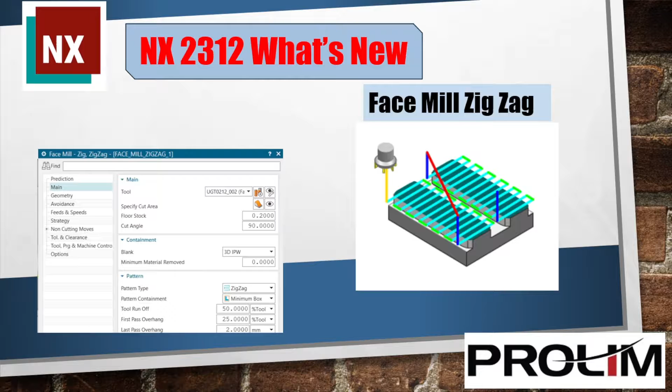Here we are, this is our Face Mill Zigzag. I have my parts set up in a vise, set up on a Haas machine. Let's go look at this operation. It lives in mill planar.

Here it is, Face Mill Zigzag. It's a milling operation that face mills a planar surface. One cut area floor must be specified. Specifying the body is optional.

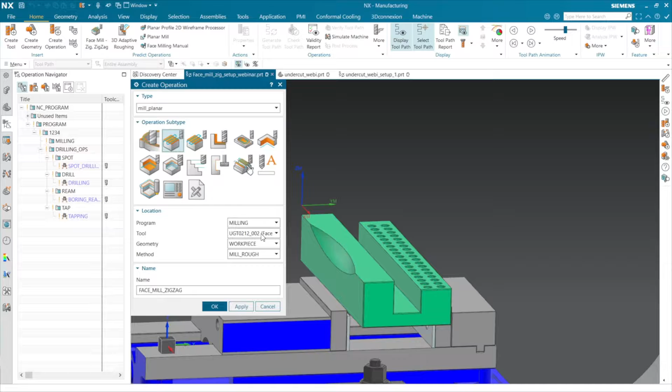We're going to go ahead and populate the rest of our parents. For our program group and our tool, we have workpiece and a 43 millimeter face mill. That all looks good.

First things first, let's go ahead and select a planar surface up here. Select OK, and we're going to let it rip and generate and see what we get. We get our first toolpath — it's just a straight path that goes across the top of the part.

That is due to our floor stock condition being 200 microns up here. Another option we have right here is a cut angle. We can actually change our cut angle.

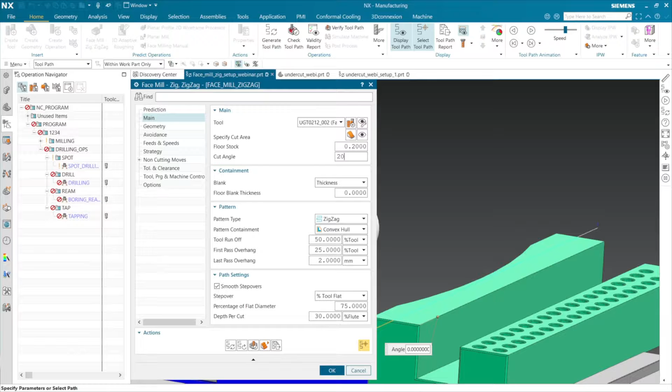I'm going to go ahead and put a different angle in here — let's put 20 degrees. You can see we get a little preview here that shows where the tool is going to be, and it can show the center line of the tool as it goes across. Let's go ahead and generate that — you can see how that works.

Right now I'm going to set that back to 0, and we're going to look at our containment. Right now that's set to thickness, and it was set to 0. We can set that to blank geometry or 3D IPW.

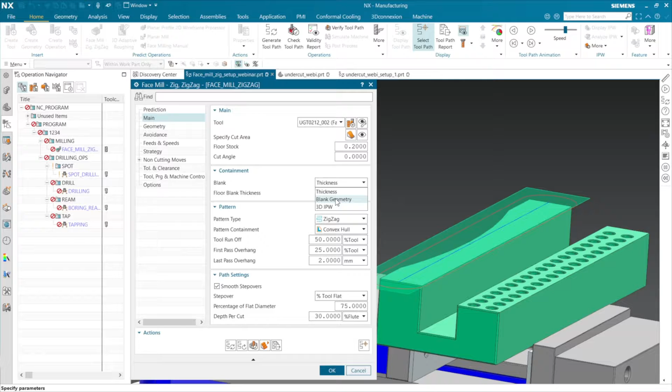Let's see how that looks. We see a preview again, and we see our operation now taking into account our in-process workpiece, or our blank.

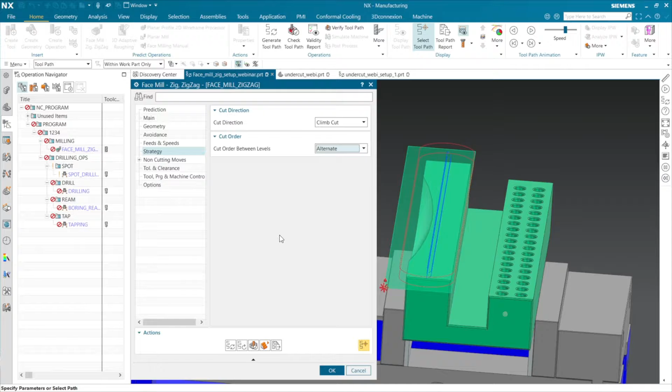Some other options we also have in here: we can also change our cut directions as well as our cut order. We can actually alternate our cut direction if we're not happy with going just one direction. You can see how we have two separate tool paths here.

Generate that and see what we get there. Very easy to get a toolpath out of this operation.

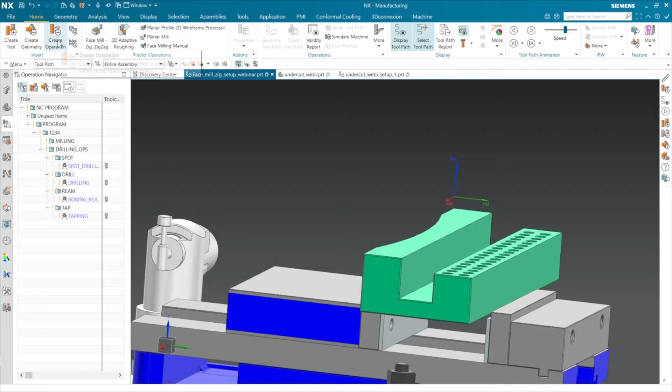Let's look at some other things in this operation. I'm going to go ahead and create a new operation, and we're going to select that bottom face. All the parents I'll keep the same. Let's go ahead and select this other bottom lower face, and let's generate that. Let's see what we get.

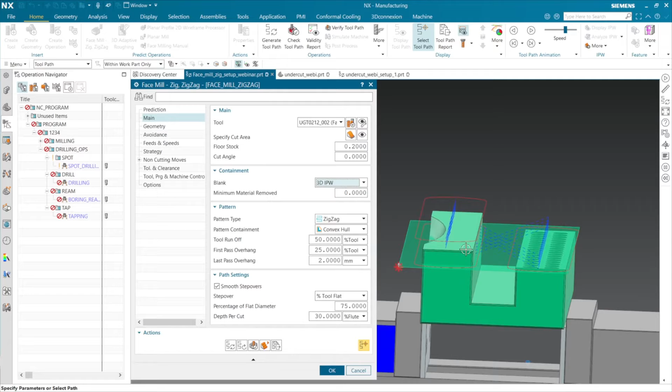Once again, we get a single line across here because we're only looking at our thickness of 0. We go back to 3D IPW, and you see we actually get the whole part now. We get that preview on the part, but as you can see, we have a bunch of collisions.

So we need to fix that. If we go into our avoidance tab, we'll be able to fix this. Let me show you where that is. In avoidance, you see we have an option — go ahead and set that to trim.

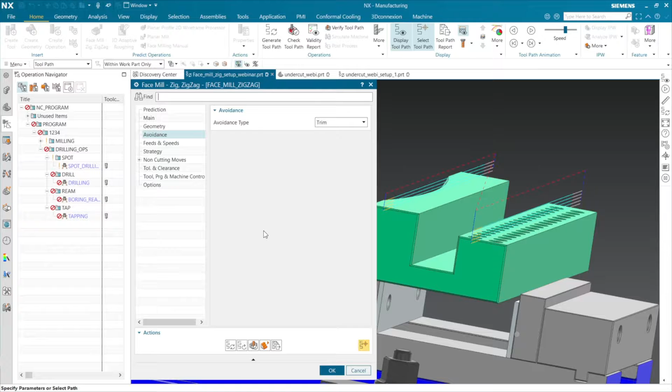We generate that again. It's going to trim away those tool passes that give us collisions, and now we have two planar surfaces that are different levels merged together. That's a pretty awesome way to be able to do this operation.

We also have smoothing options in this toolpath as well, so you can smooth out all your non-cutting moves and transfer moves. And once again, that was Face Mill Zigzag.

So next we're going to look at Merge Path Planar. We can take two planar mill paths and merge them into one. Let's take a look at how this works.

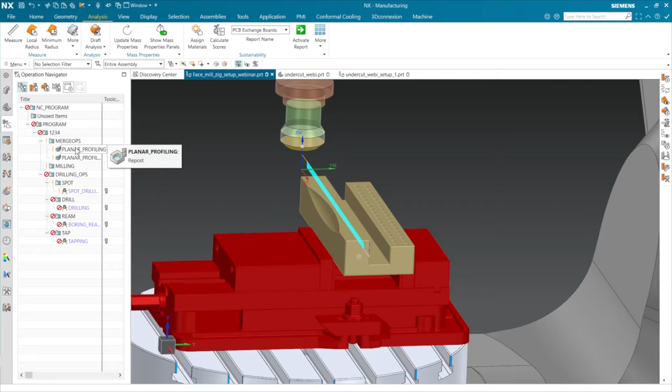So I have previously created two planar profile operations in my program here, and we can see there's just two separate operations, and we can actually go and merge them together. Let's show you how to do that.

I'm going to go to my Home tab, and we're going to go to our Create Operation. Go ahead and hit that, and we can see we have a Merge Path Planar there. We're going to go ahead and select that, show you how this works.

You can see we don't have many options. We have this by concatenation, and that's our only option. We also have non-cutting moves — since we're just joining two tool paths, that's basically our only options, our non-cutting and transfer moves.

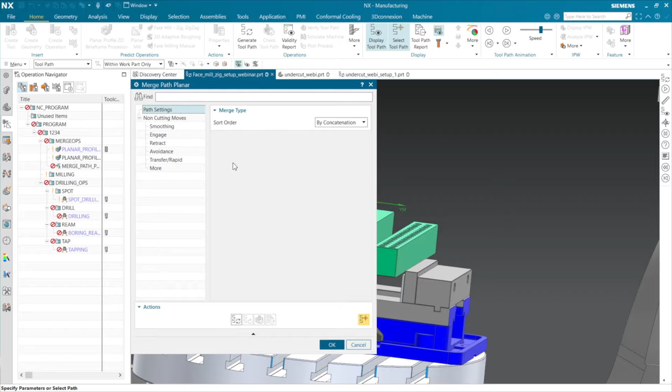So if I go ahead and take these tool paths, shift select them, I can then drag and drop them into that merge path, and then we can generate this set.

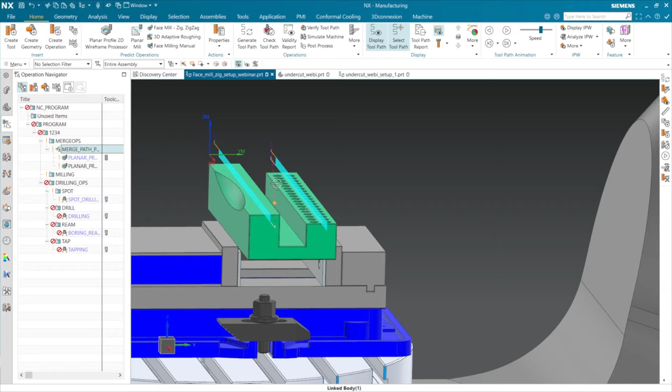And very quickly, you'll see what we have is a transfer move joining our tool paths — exactly what we wanted, and it was very quick and easy to do. So that is Merge Path Planar: our tool coming in on our upper level, transferring over, and doing our lower level.

Once again, that was merge path planar.

All right, so next we're going to look at this quick roughing operation. It's recommended for removing large volumes of material on mold cavities and cores, and it's kind of like a cavity mill on steroids. So let's look at this operation.

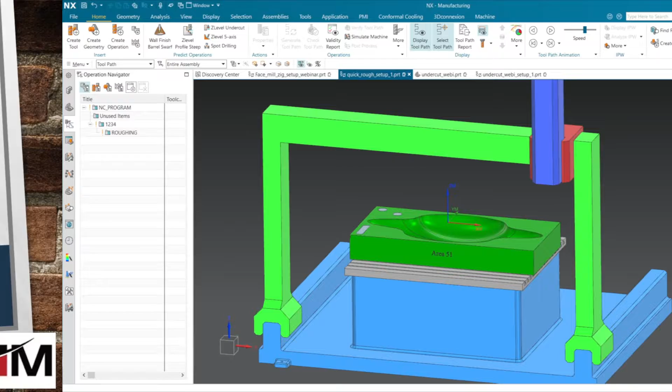All right, so let's look at this toolpath. I have my Area 51 spaceship mold set up on my bridge mill there, and we can go ahead and create this operation. So here's that quick roughing operation. We've called it a cavity mill on steroids. It's basically cavity mill, and there are some presets in here for transfers that kind of help us out.

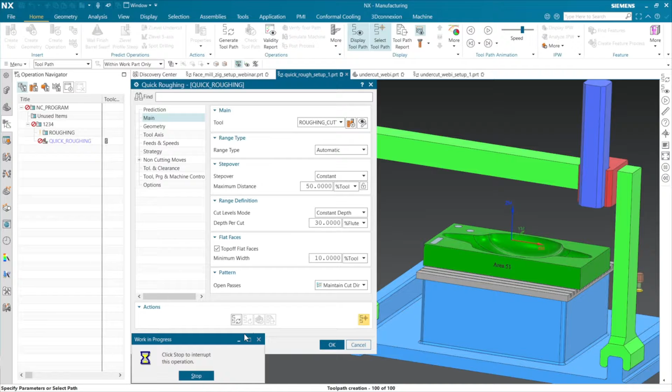Let's hit generate and see what we get. It might take a few minutes to generate because this is a fairly large part and it's going fairly deep. But what we're going to notice with this toolpath is NX is automatically going to change our engage types depending on its open area or closed area.

The only thing we would have to change in this toolpath is possibly, well, let's look at the layers first. So we can see on the top layer we came in from the side, and as we start going down, we change into a helix, where we're helixing into the part right at the transition.

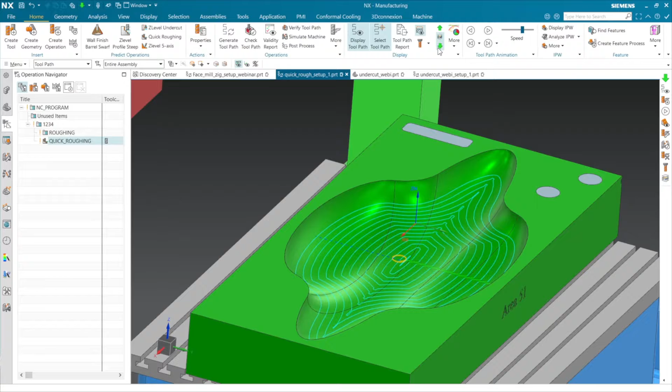So NX right now is working its way from the center out. That's based on our cut type of cut pattern, and you can see as we go down, it's going to keep on hitting the areas it can with that size tool.

So this is a very quick, efficient roughing method, depending on, of course, your cutter and your feeds and speeds.

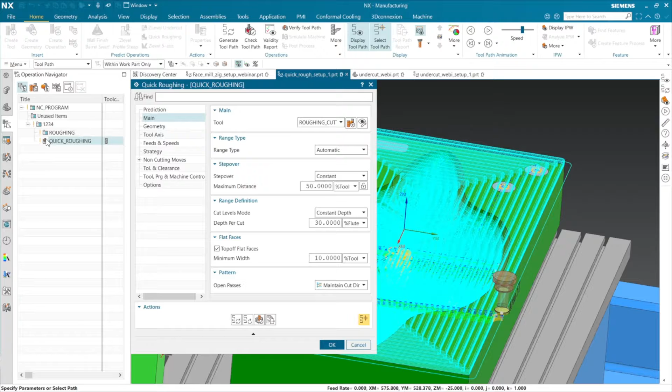We also have options for our range, cut ranges, and we can also have options for our depth or level first. We can apply smoothing to our passes, and also the region size.

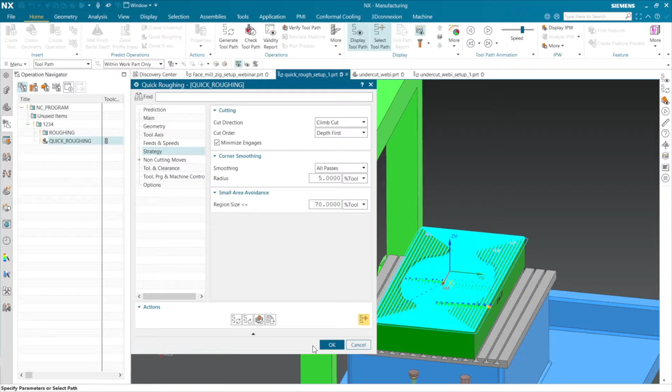So that's our quick roughing toolpath. A very quick and efficient way to rough out large areas.

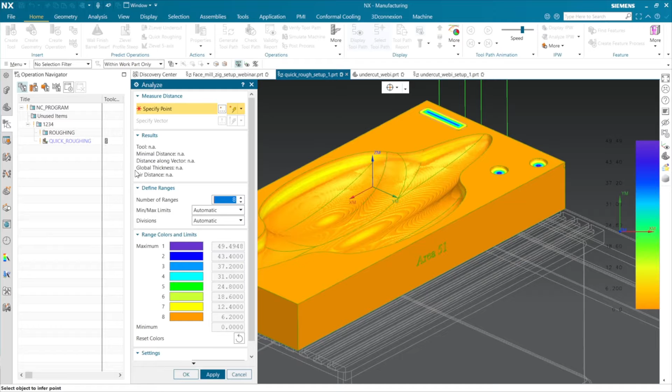So let's go ahead and take a look at our analyze our in-process workpiece and let's see what NX did to remove material. We still have quite a bit of material left, but we're definitely closer than we were when we started. We can come in and do some semi-finishing operations before we start our contouring and finishing operations.

So that was our quick roughing toolpath. That's, once again, new in 2312. Hope you get a chance to use it.

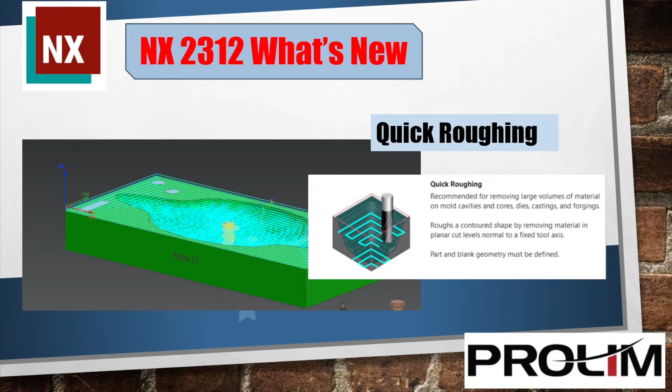So here's the next thing we're going to look at. We've had Z-level undercut for a while, but NX has added some enhancements in 2312, and let's take a look at what those look like.

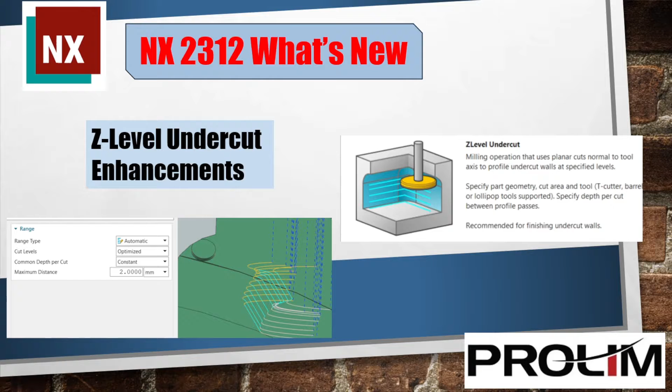So I have my parts set up here on my Makino D200Z, and we're going to go ahead and create an operation. I previously put some tools in here and have stock set up.

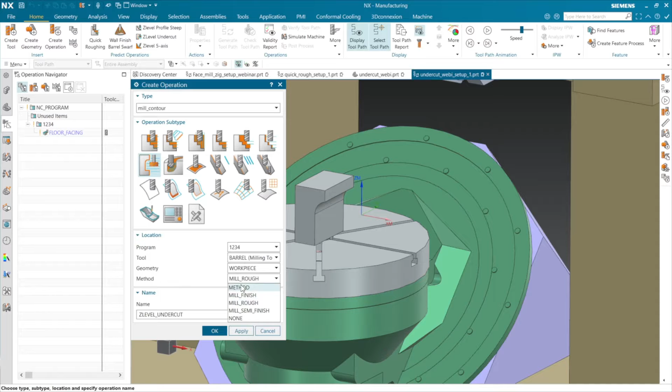So we're going to select the Z-level undercut. I'm going to put my barrel mill that I already created. Let's go ahead and go with mill semi-finish, and I'm going to go ahead and generate this once I select my cut area. Simple click.

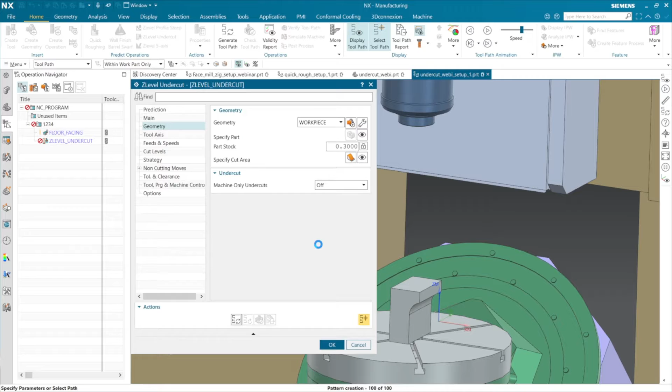And you see we also have the option here of only machining undercuts. So if we had chosen that flat face, we get that.

So we've generated, we can see we have some lines pretty far apart here. I'm going to go ahead and change the step over, the step down, so we have our tool paths a little closer together.

And there we go. You can see the space that we have as we're transitioning from shallow to steep. That's going to leave a really large scallop.

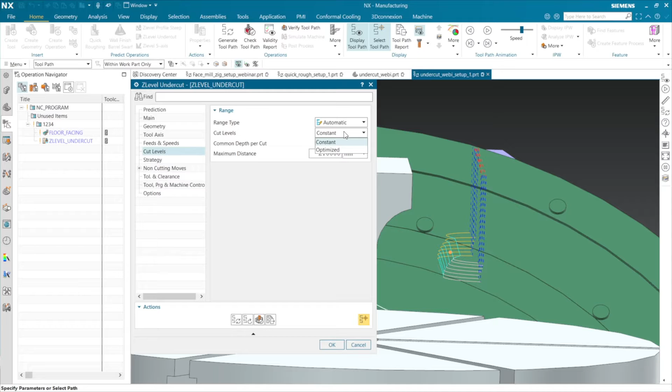And we can go ahead and change our cut levels to optimized. So that's our improvement right there, is that we've added this optimized cut levels. When we do that, you can see we've got our cut levels, our tool paths a little closer together, and that's going to help us with our scallop heights as we're transitioning from that shallow area to a steep area.

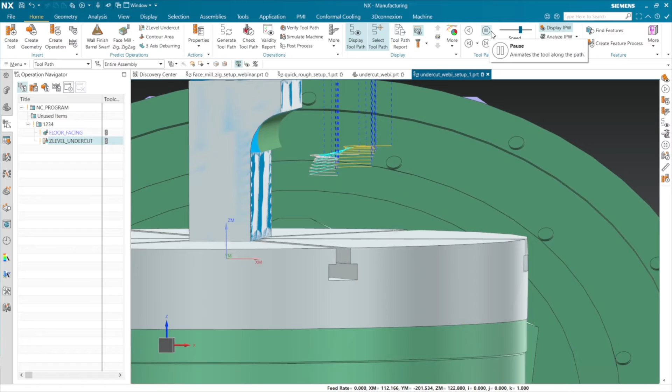You can run that, see how it looks. We're only on mill semi-finish here, so we're not coloring it out completely, but you can get the idea. So that's the big improvement, is that we added that optimized cut levels.

That's going to make it a lot easier when we go in and finish, especially—we can get a little bit more material off, a little bit more evenness when we move material, and less scallop height.

Okay, so next we're going to look at this new tool path called Wall Finish Barrel Swarf. There's a lot of options on this one, so we're going to spend quite a bit of time on it, and I think you're going to really enjoy this tool path.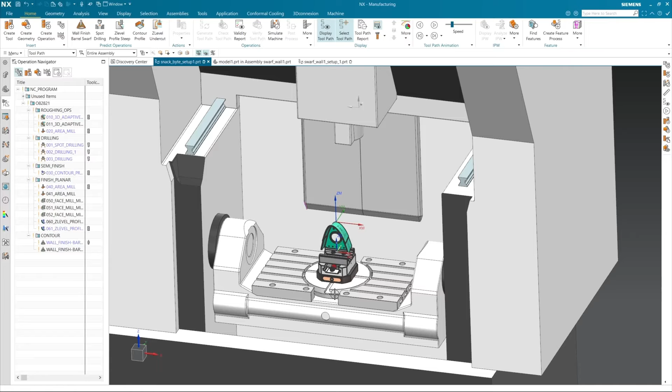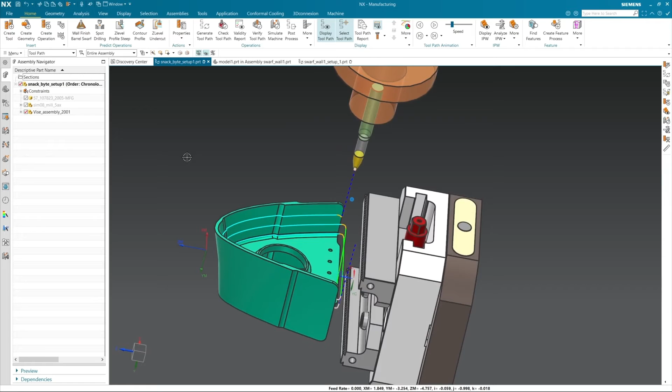So I have my little arrow part set up in my Sim 08 mill, Siemens mill, and we're going to look at these operations. I have a whole bunch of roughing operations, and we're basically down to some contouring operations for this part. So I have two set up. Let's go ahead and hide this mill so we can get around the part here. There we go. I have an inside pocket scenario set up, and I have an outside scenario also lined up here. So let's look at what the operation looks like.

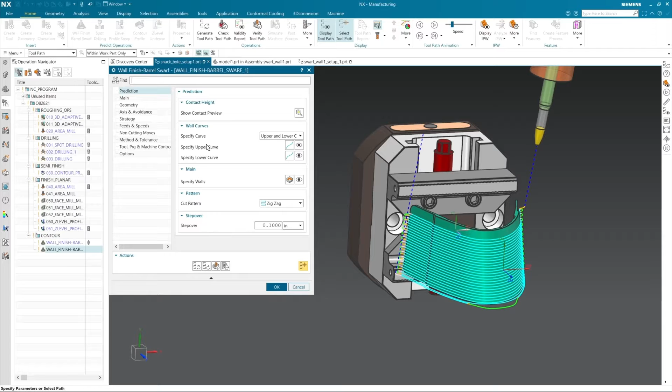See in our window, because new in 2206, I believe it was, we started to get these prediction windows, and we're going to see some of our most used options. So in our main tab, we can see what we need to specify.

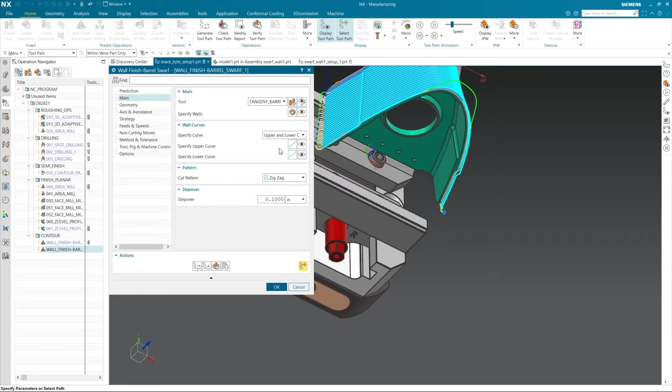So I had to come in here and specify the walls. I selected all these exterior walls as my wall geometry. We also had to specify an upper curve. I had to select a few different curves here, and our lower curve. So this is going to determine the geometry that it's following.

I'll hide that toolpath real quick. And then we have a couple more options here. We can either do zigzag, we can do zig, and we can actually do spiral. So actually, that's a pretty good illustration of how you can use that around some kind of a round part that has a draft angle in it. So that'd be a really great finishing or semi-finishing option you can have.

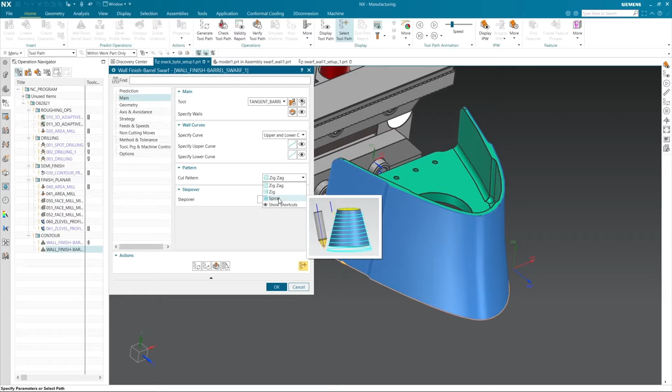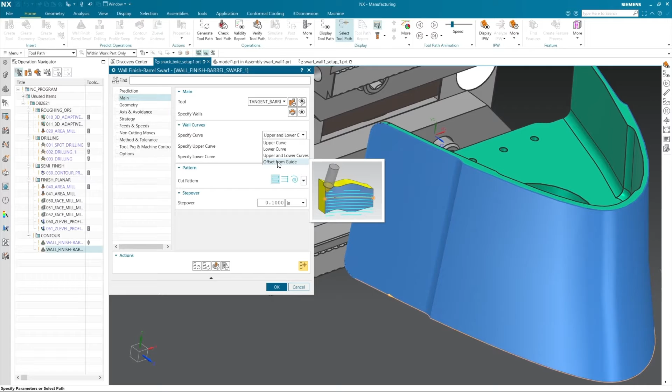We also have some options if we go with just an upper curve, just the lower curve, or the upper and lower curves. Now this offset from guide can be useful if you didn't have a good solid guide. You can see in the graphic we have here, the bitmap image, if there was some geometry in here that wasn't straight or linear, we could actually go and draw some geometry in here with a sketch and use that as our guide. We can offset from that guide. So that's a good tool to have.

We also have our step over, which we can either do in a nominal size, a percent of tool diameter, or a percent of flute length. I'm not sure if it uses the total diameter at the top of the tool, or I'm guessing it probably uses that. And we know we have the flute length, right? So right now it's set to inches.

That's the default setting. Let's look at geometry. So this is normal. We have whatever geometry we select to make sure that you have a part defined, so you can track your IPW. The part's already defined through our geometry group. You can see that under the blue skin of the selected geometry for our faces.

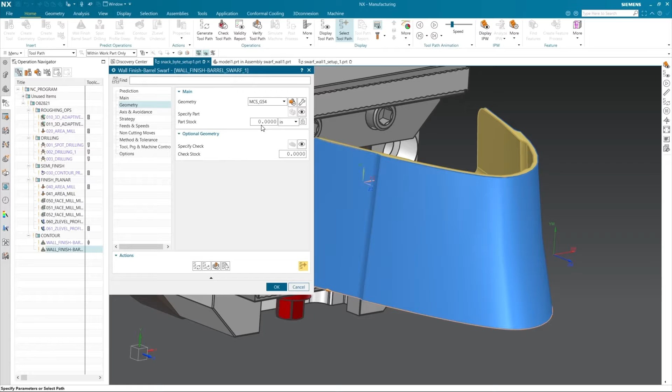And we also can specify a part stock in here. We can also have optional geometry if we had some kind of a clamp on here that we had modeled in. We could actually put some optional geometry in there.

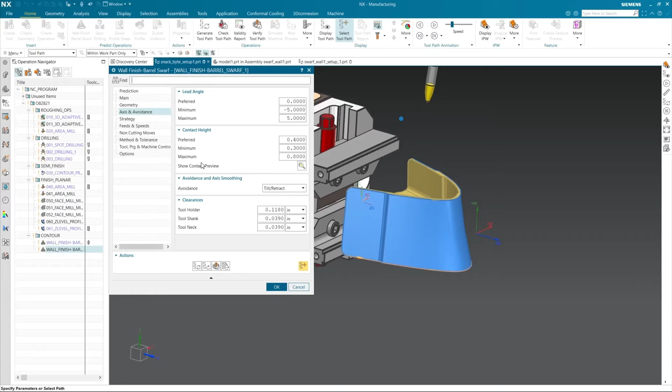So looking at the next tab, we have some axis and avoidance. And this is special to the wall finish barrel swarf toolpath. We have this show contact preview for the tool. This is pretty interesting. This is one of the interesting previews about this operation that has tool settings actually in the Windows Explorer window here.

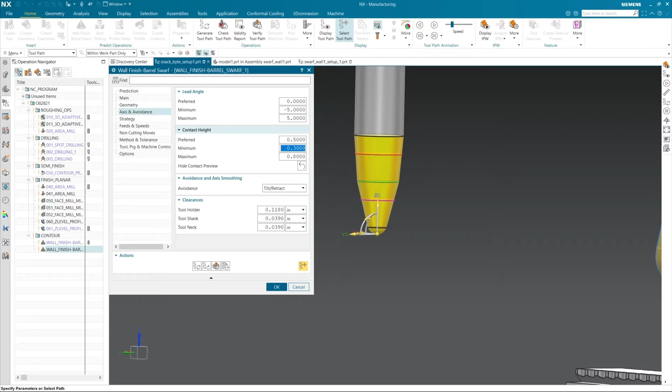And what we see here, this is actually not the default. I've been playing with this. We can see we have these contact heights. I use this little show contact height preview, and it's actually showing our contact height here. And our preferred is in green. I believe that default value is 5. Our minimum is this pink or red value you see down here. That's 3. And our maximum is 0.8. I'm sorry, I didn't put the decimal in there.

And you might be wondering now, what is that referring to? How large is this tool? It's pretty interesting. The tip of the tool being 0, and the top of the cutting portion of the tool being 1. These are all normalized values, percent values: 80% for the maximum, 30% from the minimum, the preferred 50%, this green line right here. So that's used in the tracking of the tool through the operation.

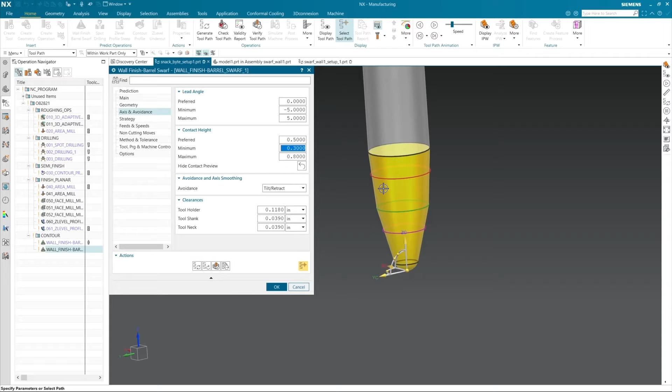And actually, I'll show you that it gives you different behavior. So if we move this tracking point up a little bit, the tool is going to tilt a little bit more this way on its axis. If we take this tracking point and we move it down, you'll see going through — this being the cutting side, of course — the tool will tilt out a little bit more to make that actually the preferred contact point.

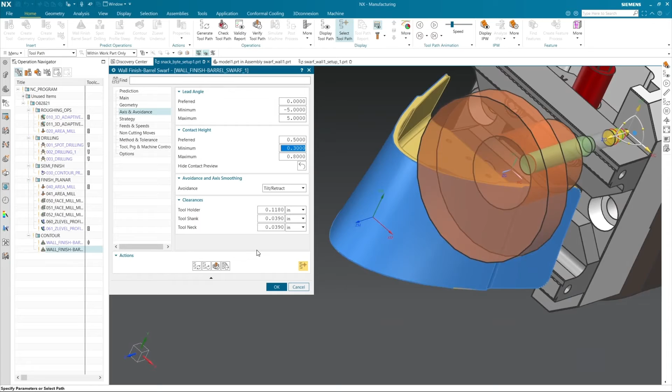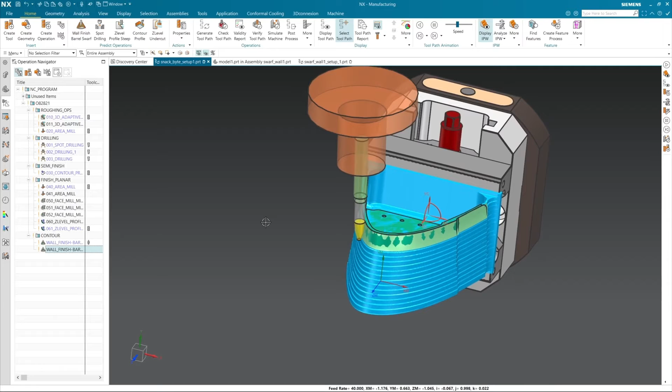All right, now that we've done that, let's see how this looks on the part here. I'll get it set up. So I've got my IPW displayed, and now we can go ahead and animate this toolpath, and we can see how this tool runs around, using that preferred contact point, and it's tilting away from the workpiece.

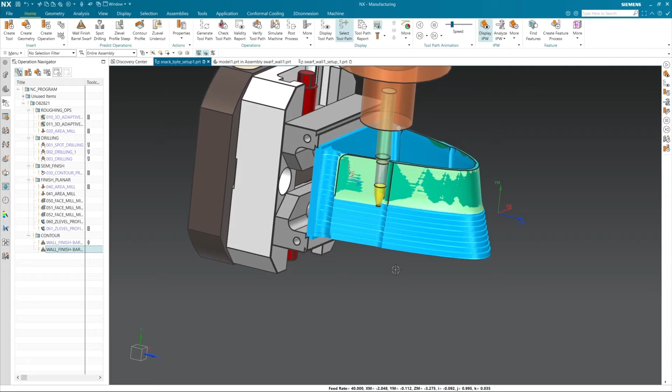I don't have many stepovers here. We'd actually get a pretty decent result with fewer stepovers, but we can see when we get into the corners, into that edge blend, the tool is going to try to maintain an axis that's tangent to that surface, so it's going to dip out a little bit and tilt over. Let's see what that looks like in a machine.

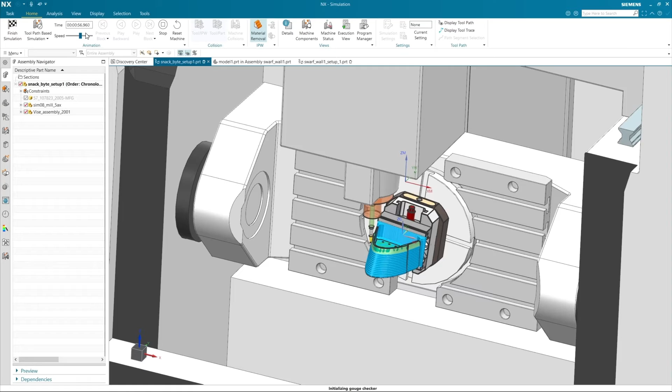So I went ahead and made my machine visible, and I'm in a machine simulation. Let's see what that looks like. You can see that little tilt in the axis there to get around that edge blend. You can see how that runs across, back and forth.

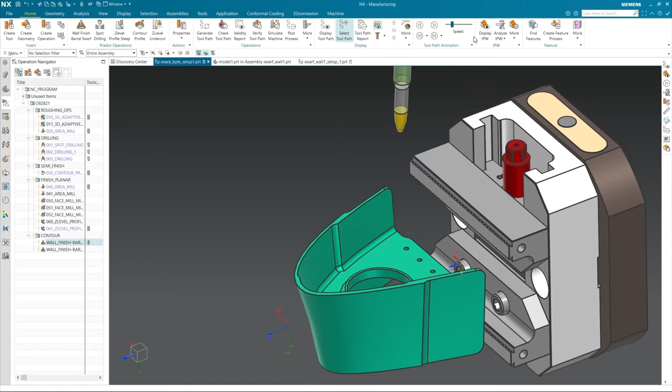All right, so let's show you a couple of other scenarios. Here we have a toolpath. We're on the inside, I've got 3 stepovers. This is a zig mode when we're doing a climb cut, and let's see how that works. I think I did a stepover of something like a quarter inch for that one. Let's speed this up a little bit.

We can kind of see how we get those nice large scallops. We're about to see how we get those scallops when we look at the tool. So let's look at that tool.

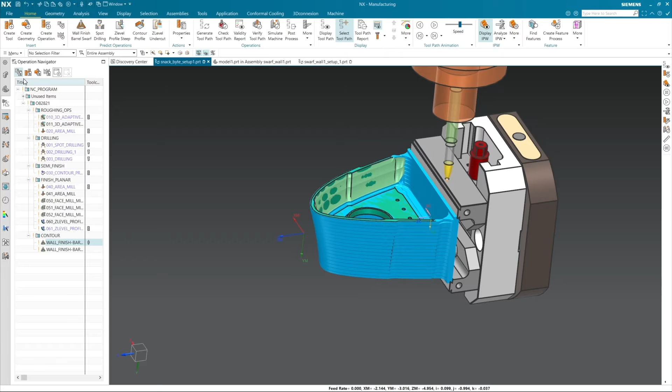So I've pulled up our tangent barrel tool, and we can look at some of the parameters in there, so we can see how this tool is defined. The diameter is going to be this top area here, that's 0.375, that's the same for the neck of the tool. And that barrel radius, that's the tip down here.

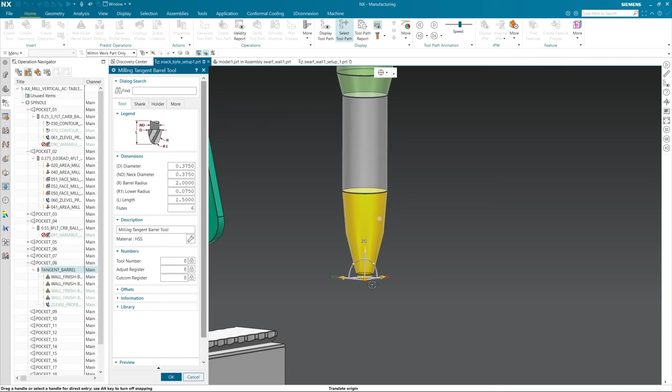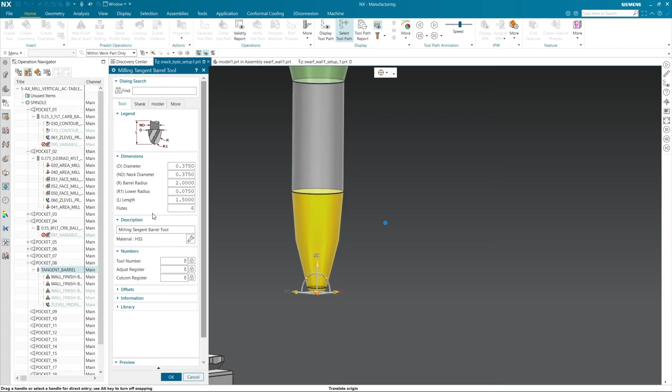So that's, not the tip, I'm sorry, the radius of this part right here, this barrel - this is a 2-inch radius going from the top of the tool over the 1.5 inches of the tool. And the lower radius is 0.075, and that's how this tool is defined. You can also put in your materials of the tool and everything like that.

So here's our first scenario where we're doing just a zig cut. You can see our high-speed moves back into our engage cuts. Let's see how that looks. You can see we do nice little high-speed loops, kind of like helixing down across the part, efficiently removing material.

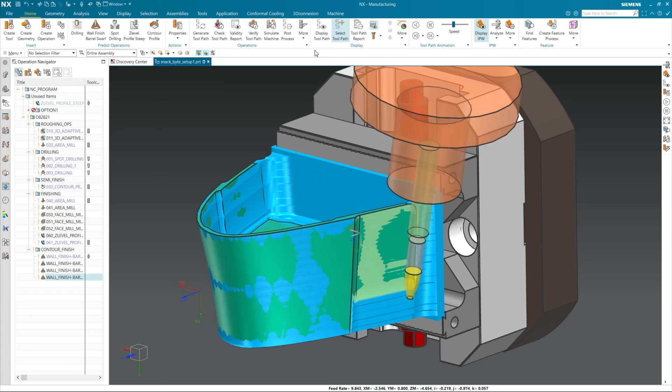And here's that zigzag pattern. That's just basically going back and forth, climb cutting and conventional cutting with these high-speed loops in here. Let's see how that runs.

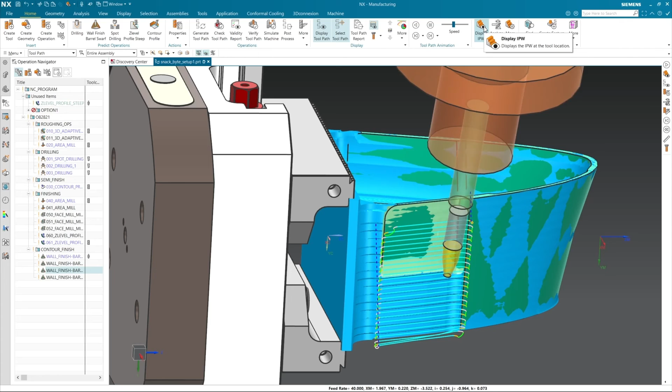Feeds and speeds are feeds and speeds. And within our non-cutting moves, we have very few options. Automatically we have what we normally would like here, but we can change our arcs, our transfer types, blend spline, or clearance. Blend spline is what's making these loops right here. If we change this to clearance, we'll probably see more retracts, and our clearance is set automatically to 118 thousandths.

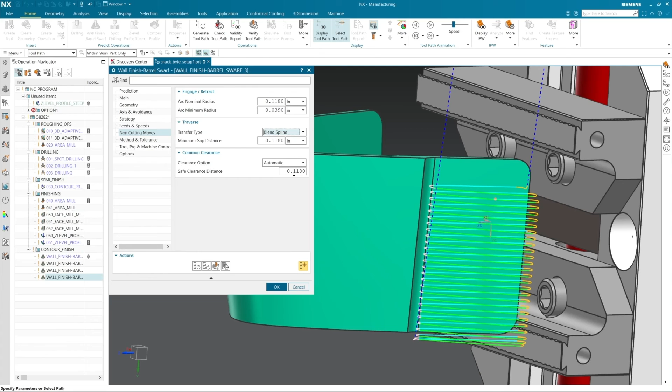So I've got another part set up here. There's something I wanted to show you about our tracking point, and getting down into corners. So NX is automatically going to come back into these - let me get this straight here - it's automatically going to come back in these corners and tilt that tool out a little bit more to get more of this blend corner.

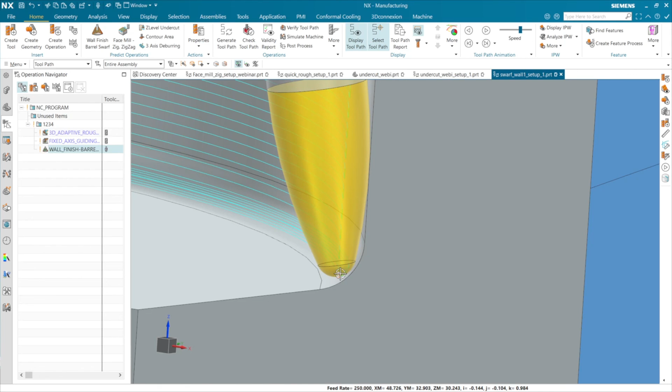As you can imagine, if we didn't have those additional moves that come back up, we'd have a lot of material left. So NX is automatically going down to that minimum tracking point and actually removing this material in here. And one other thing of note on this toolpath - we can actually cut with the tooltip. We will cut with the tooltip, but it's not designed to cut with the tooltip.

So that was our wall finish barrel swarf toolpath. Thanks for joining us on this episode. We hope you join us next time.